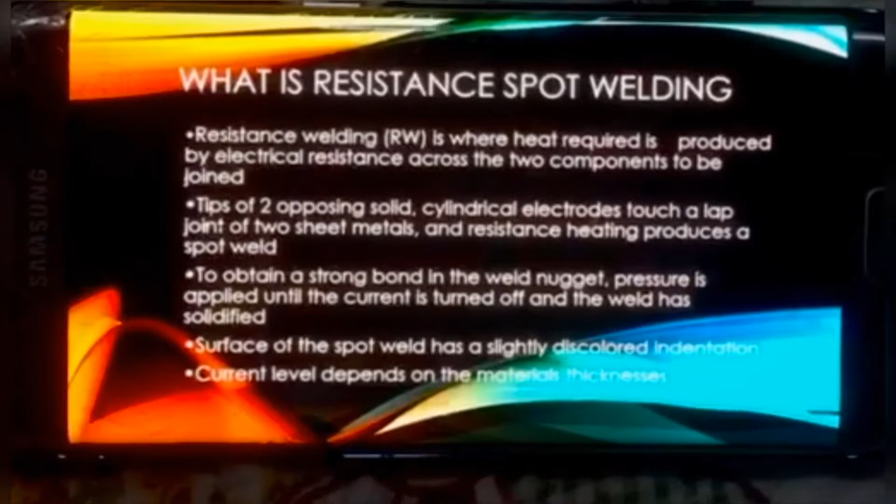weld. Next, to obtain a strong bond in the weld nugget, pressure is applied until the current is turned off and the weld has solidified. Next, the surface of the spot weld has a slightly discolored indentation. Next, the current level depends on material thickness.

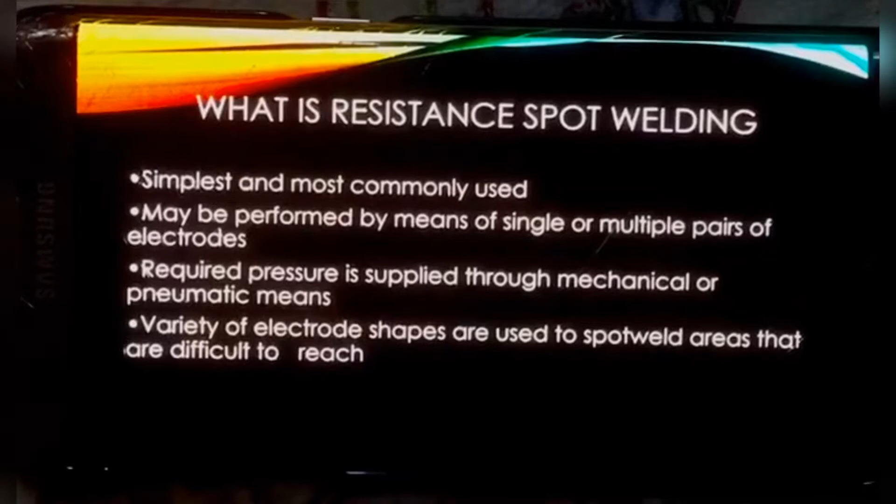It is the simplest and most commonly used, and may be performed by means of single or multiple pairs of electrodes. Next, the required pressure is supplied through mechanical or pneumatic means. Lastly, a variety of electrode shapes are used to spot weld areas that are difficult to reach.

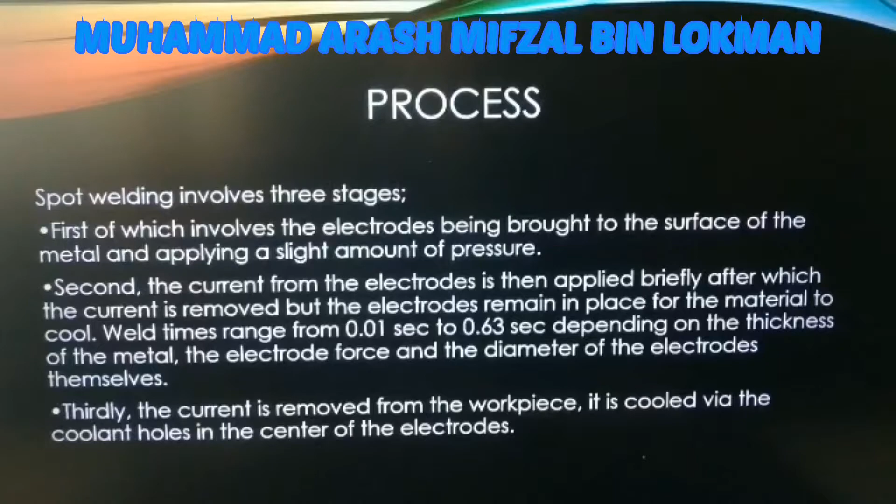The process of resistance spot welding. Spot welding involves three stages. First, the electrode is brought to the surface of the metal and applies a slight amount of pressure. Second, the current from the electrode is then applied briefly, after which the current is removed, but the electrode remains in place for the material to cool.

Weld time ranges from 0.01 second to 0.63 second depending on the thickness of the metal, the electrode force and the diameter of the electrodes themselves. Third, the current is removed from the workpiece. It is cooled via the coolant hole in the center of the electrode.

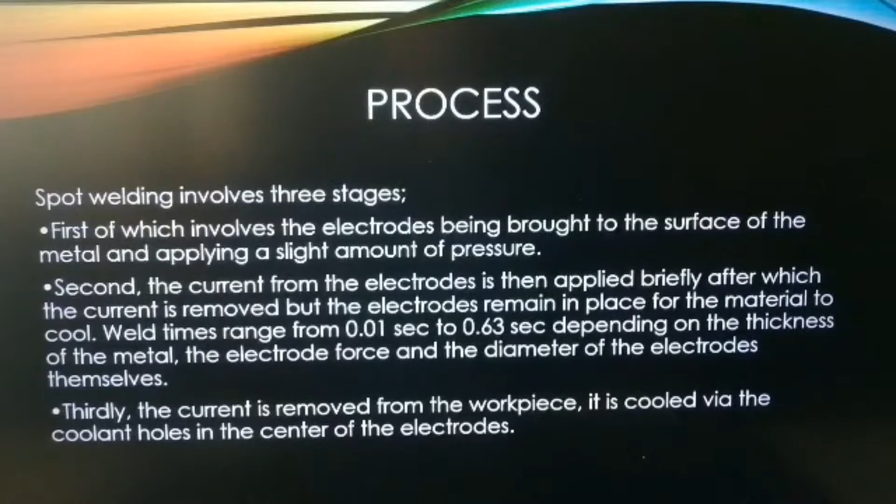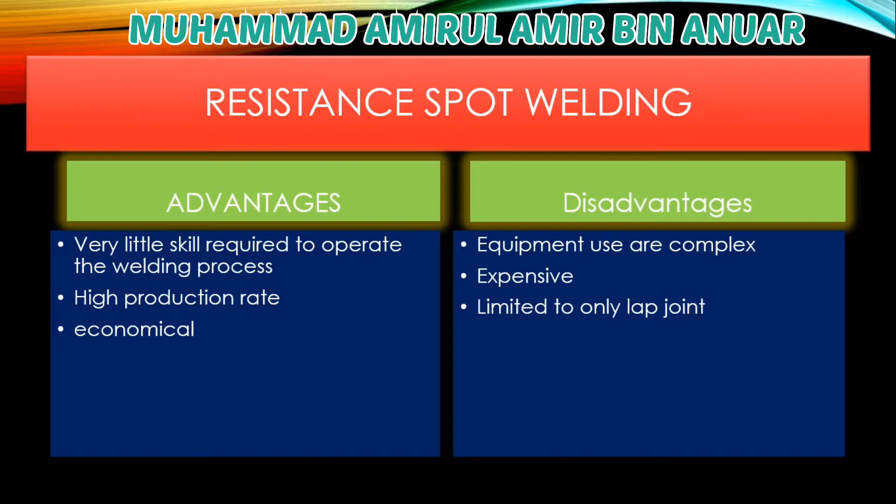Advantages and disadvantages of resistance spot welding. The advantages are very little skill required to operate the welding process, high production rate, and it is economical. For the disadvantages, the equipment used is complex, expensive, and limited to only lap joints.

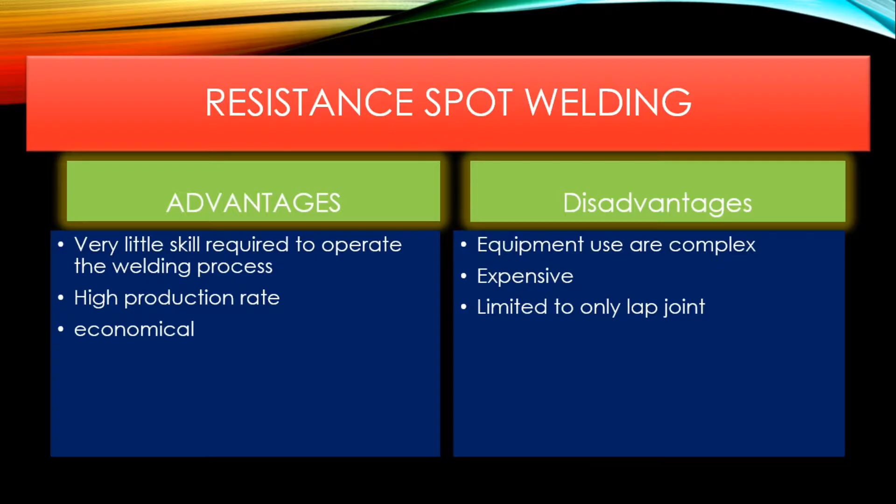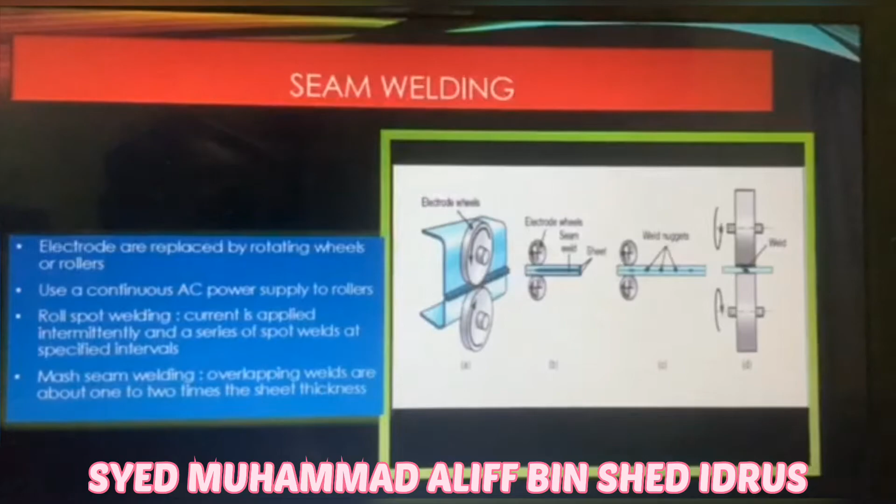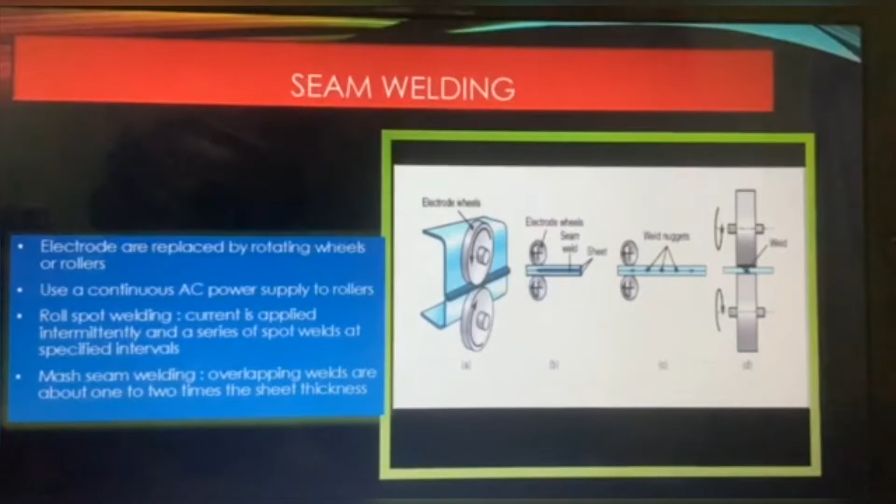For seam welding, electrodes are replaced by rotating wheels or rollers, using a continuous AC power supply to the rollers. For roll spot welding, the current is applied intermittently, producing a series of spot welds at specified intervals. For mash seam welding, the overlapping welds are about 1 or 2 times the sheet thickness.

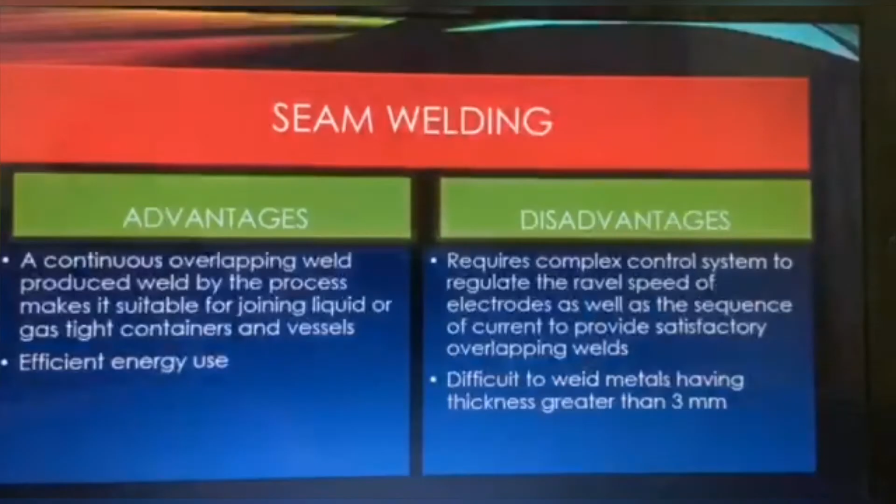as well as the sequence of current to provide satisfactory overlapping welds, and it is difficult to weld metal having thickness greater than 3 mm. Last but not least, the welding defects. They consist of porosity, slag inclusion, incomplete fusion and penetration, weld profile and cracks.

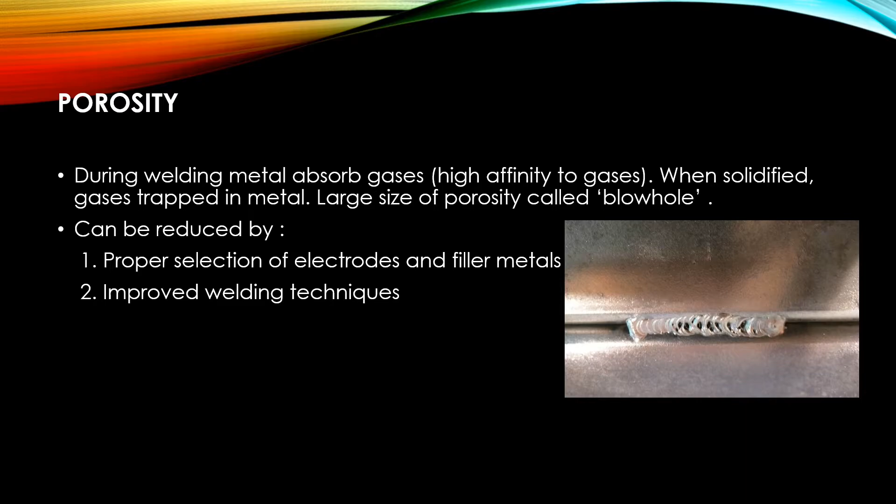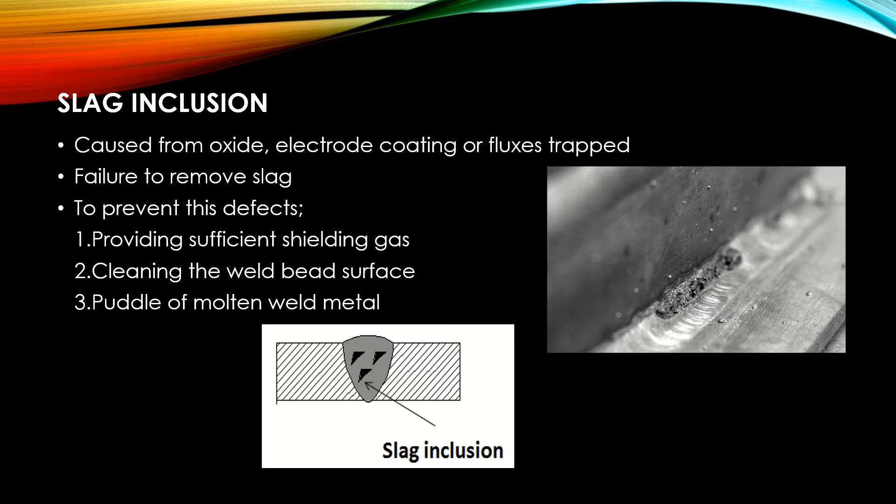For porosity, during welding the metal absorbs gases, it has high affinity to gases, and when solidified, gas is trapped in the metal. Large-size porosity is called a blowhole. It can be reduced by proper selection of electrodes and filler metals and improved welding techniques. And for slag inclusion, it is caused by electrode coating or flux trapped and failure to remove slag. To prevent this defect, provide sufficient shielding gas and clean the weld bead surface and puddle of molten weld.

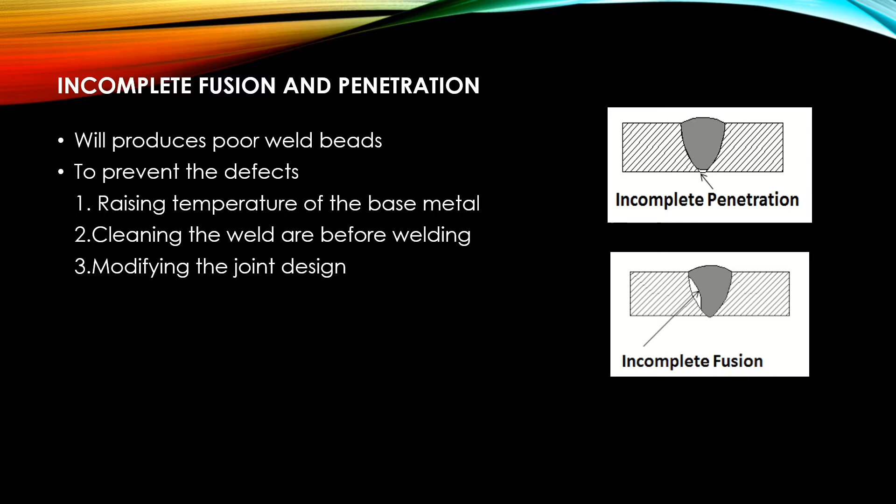And the third is incomplete fusion and penetration. It will produce poor weld beads, and to prevent the defects is by raising the temperature of the base metal, cleaning the weld area before welding, and modifying the joint design.

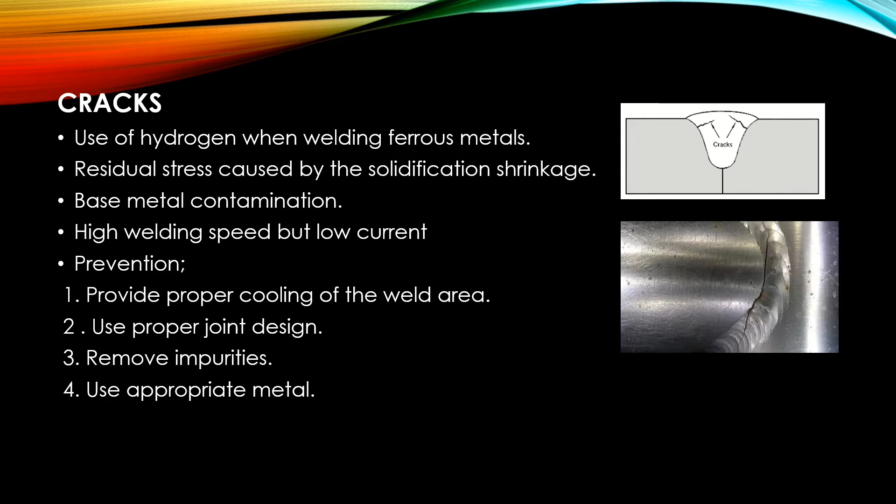And cracks are caused by the use of hydrogen while welding ferrous metals, residual stress caused by solidification shrinkage, base metal contamination, and high welding speed but low current. To prevent these cracks in welding, provide proper cooling of the weld area, use proper joint design, remove impurities, and use appropriate metal. And lastly, weld profile.

Weld profile is important because of its effect on the strength and appearance of the weld, and it can indicate incomplete fusion or the presence of slag inclusions in multiple-layer welds.